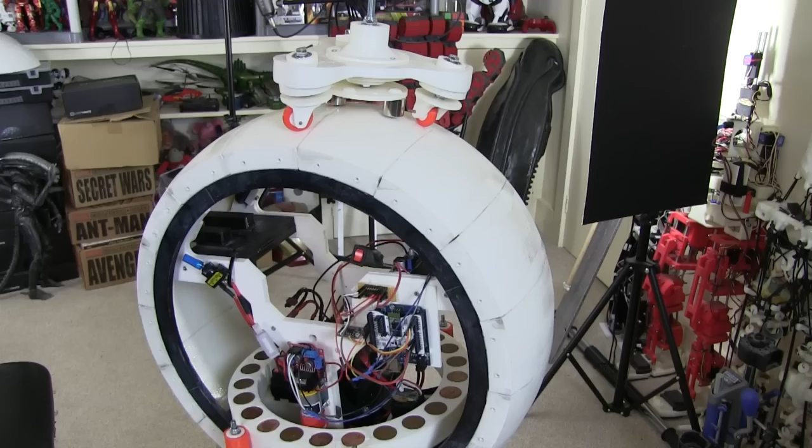Last time I worked on this dolly for the head, which has a magnetic coupling to the inside allowing the head to move in all directions. It's got a separate hub in the middle on bearings, so the head can rotate without all the casters changing direction. It's currently just stuck on with a plate in the bottom.

Today I'm going to work on the arm that actually moves that plate around, and it moves it in all directions and turns it. I'm hoping to use that for some form of side-to-side stabilization, but I need to work through that as I go.

Let's have a look at some CAD. This is what I've come up with so far for moving the head around, and it needs to move forwards and backwards in the direction of drive, needs to move sideways, and needs to rotate.

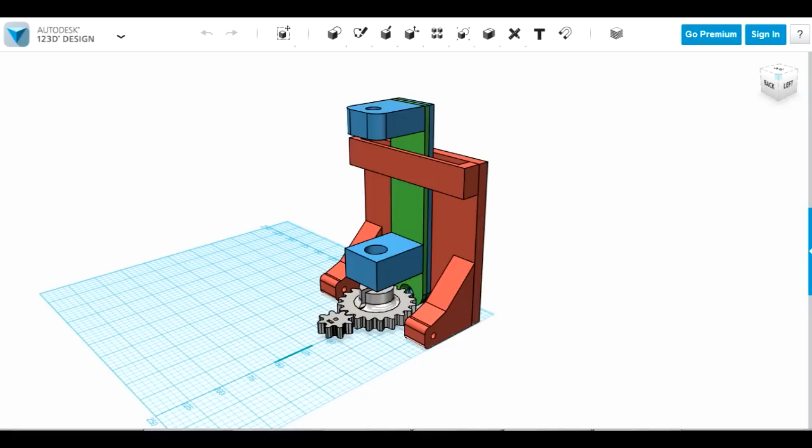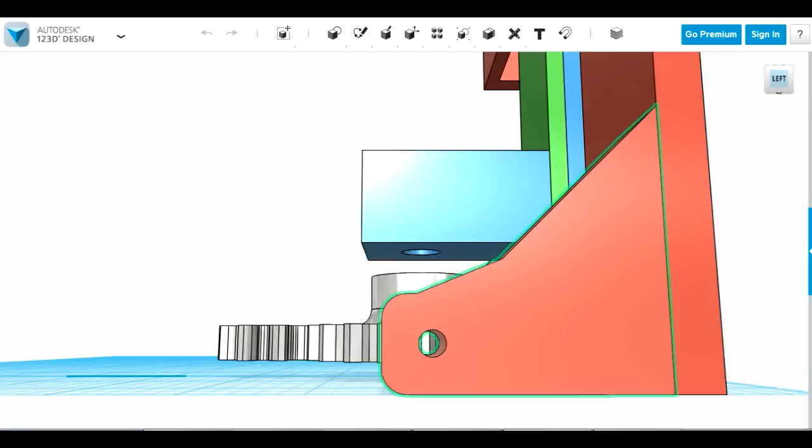Let's look at this red thing first. This pivots through the centre of the ball, and it has to pivot there so everything tracks the radius of the ball okay. This is going to have the magnetic coupling right on top, so it has to track that surface as closely as possible. The holes here go right in the centre of the ball on the internal hub.

There's a sort of pivot thing sticking up, and that's going to be on an arm or some sort of linear actuator I haven't designed yet that pulls it forwards and back. So the pivot point is actually right in the middle of the ball, and that moves backwards and forwards.

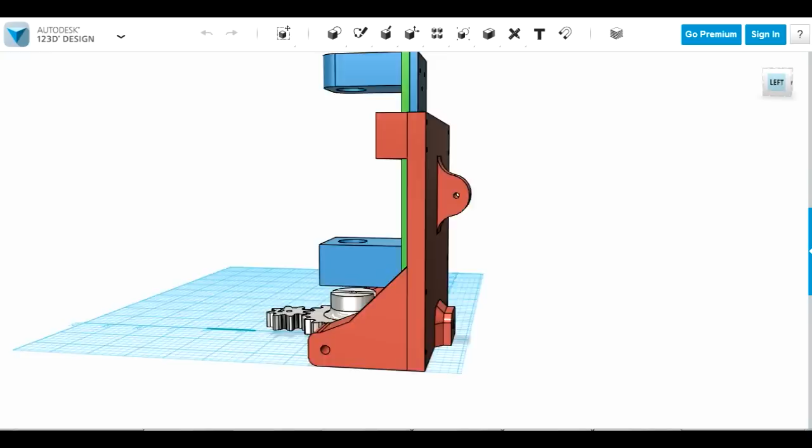The blue and green thing is made of 2 pieces, and that pivots through the hole right at the bottom of the red piece, which is also at the same height. So it's effectively on the same plane as the centre of the ball.

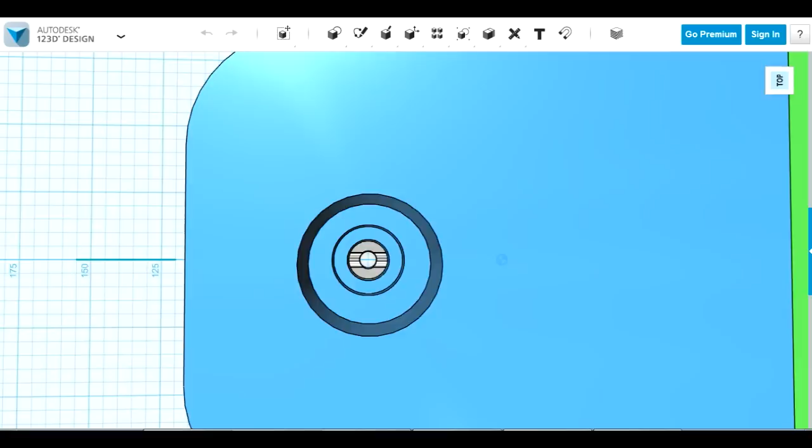We've then got another shaft that runs right through the middle of the blue pieces, let's just align them there. That's going to be a piece of 6mm studding which goes through bearings, basically controlled by these gears. The big gear is going to be fitted onto that shaft, and I've got a kind of thing here I can compress onto it by putting a hose clip round. The small one is going to be fixed onto a motor mounted on the bottom blue block somehow, with a motor mount I haven't made yet.

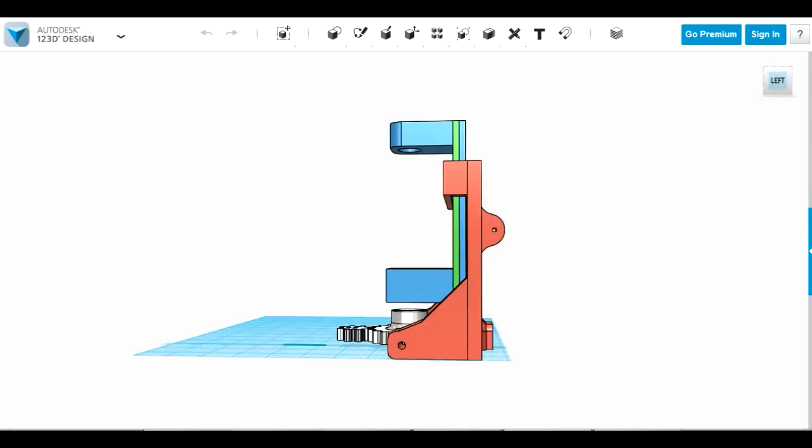That means the piece of studding runs exactly through the middle of the ball. It's in line with the hole in the bottom of the red thing, and therefore everything pivots around that point one way or the other.

Here are some of my parts that I've made. This has been made in multiple pieces. The green piece, if we'll call it that, has been made in 2 bits of ABS, and I've put these back to back to take out any warpage so it's perfectly flat. That piece pivots on here, and this sort of holds it, a bit like a strap.

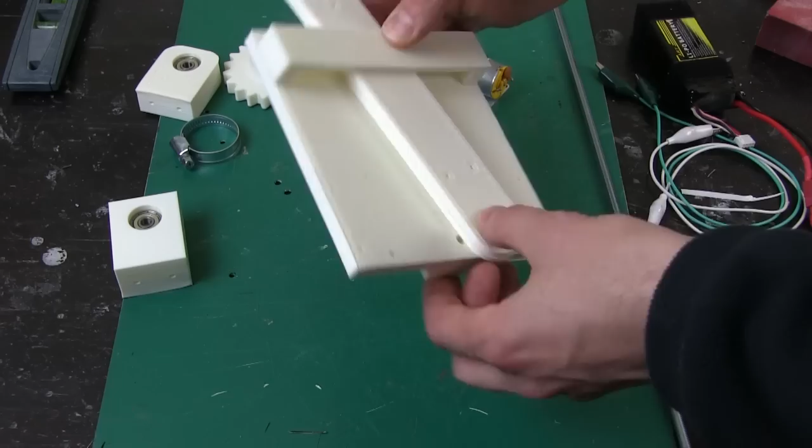That's printed separately to the back piece. I've also got side pieces that fit on here, which are still printing, and then I've got a piece of 6mm studding that goes this way, and that will rotate through these bearings.

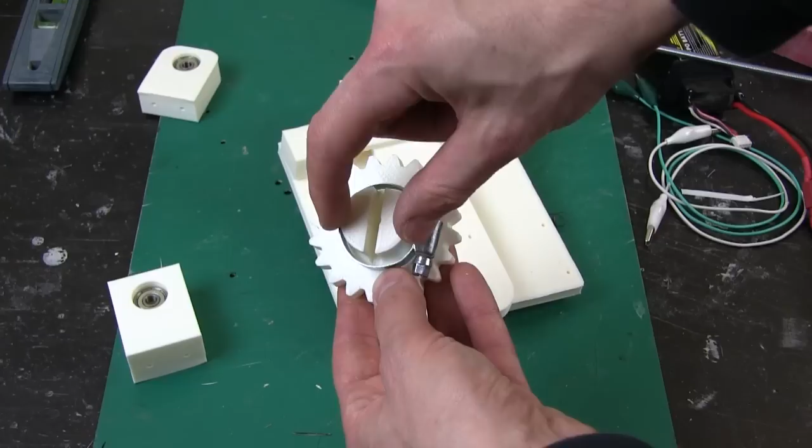At the bottom is a gear, and I've got this hose clip which goes around here so I can tighten this and it squashes it, and that grips properly on my piece of 6mm studding. I've actually printed these gears, one on the motor, and they work pretty well.

I've still got a bolt here which I need to take out, or at least make shorter, and that goes into a nut. There's a captive nut in there it screws into, so that holds it secure against the flat of the shaft.

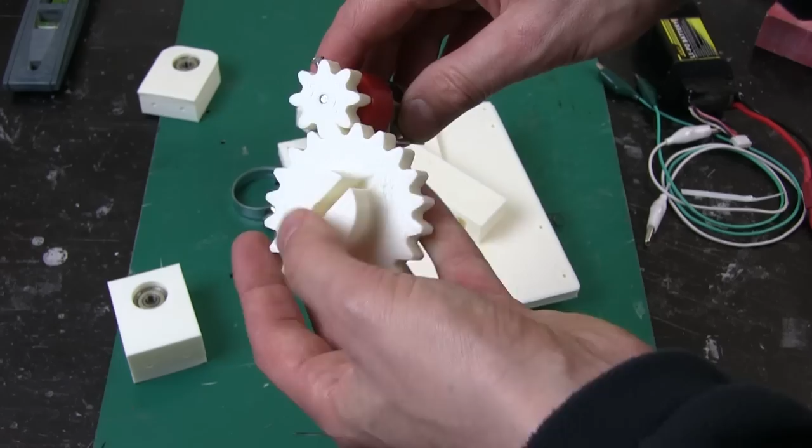So this will drive this round, and this is the head rotation. I need to get those extra brackets printed and screw and solvent weld all of this together, then hopefully it should be clear what on earth I'm talking about.

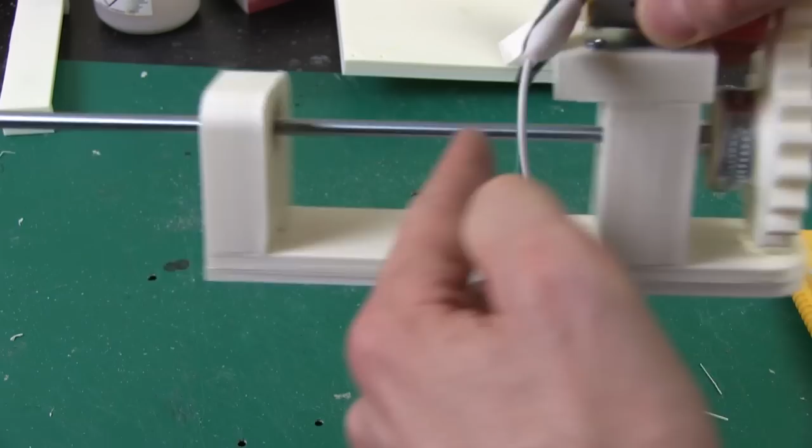Here's the first aspect of that head rotating mechanism, which is the dial piece, which moves side to side. I've mounted the motor there, and I've just printed an additional block that's exactly the right height. I've got my bearings in there, and eventually there'll be a nut to hold this shaft in exactly the right place, and I've got my hose clip on and a nut on the bottom.

So this appears to turn quite well. I've actually got this connected straight to a LiPo, so let's just connect that. So that's alright, and then this shaft of course turns the head.

Now it is going pretty fast, as you can see. There's nothing worse than a droid with a slow head, so obviously this is going to be speed controlled, so I'll slow that right down.

This shaft is turning all the way through bearings, which have just come out. Yeah, I really need those nuts to hold the bearings in. But this shaft turns all the way through these bearings, and then it turns the magnetic assembly on the outside, and that's turning another shaft through bearings which turns just the head shell. So hopefully that's enough torque.

This is only a 30-to-1 geared motor. If it's not enough torque, I can go to 100-to-1. These are the discarded motors from my first ball balancing BB-8 that I then upgraded for higher torque ones. So I know I can get a motor in exactly the right size which will fit and rotate 3 times slower with 3 times as much torque.

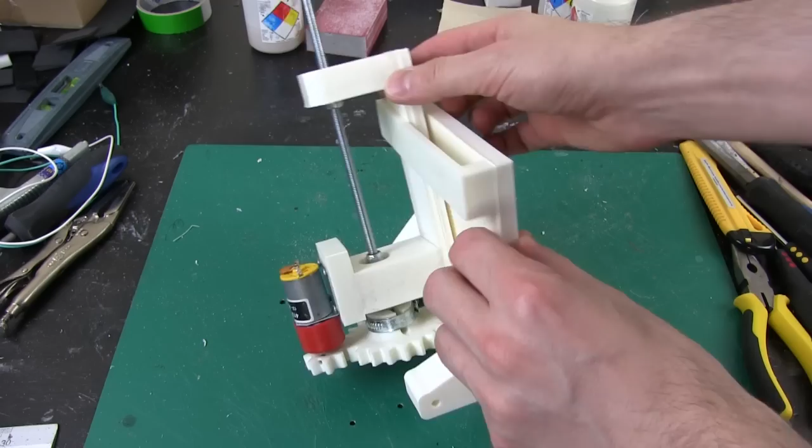Here is the mostly assembled mechanism. This moves this way, and it will eventually be pulled sideways by something depending on how much force it requires, probably a servo.

Here's the pivot point for backwards and forwards, and that will get pulled against this pivot point, like so. And this pivot point goes right through the piece of studding, and so does this one. So this thing always pivots around the exact centre of the ball.

So let's get that fitted inside, and we need to make a thing to stick the magnetic head coupling on as well, and then we'll see if that can move the head around and how much force is required.

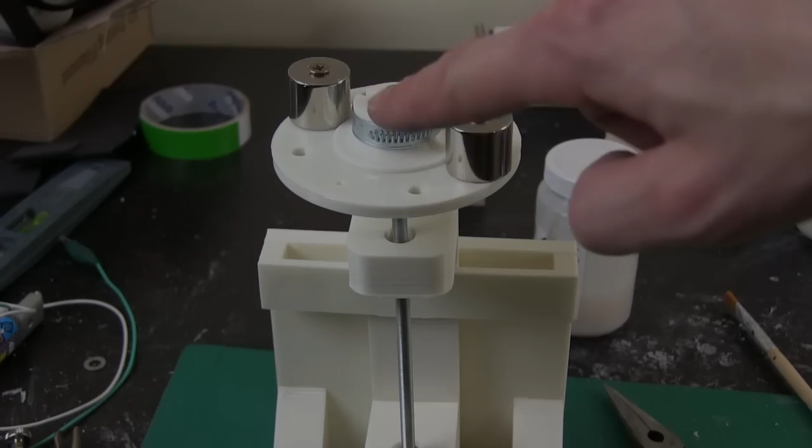I've just attached this additional piece here with another hose clip that's attached to the top plate. So now as the motor turns, it turns this magnetic plate round. Hopefully I can now squeeze that in the top half of the droid.

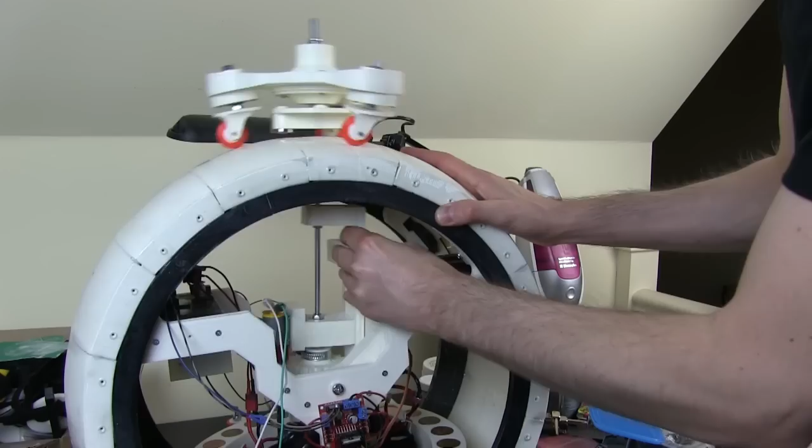I've got my head lever mechanism fitted inside now. I've got the magnetic coupling plate there on the inside, mounted right on the top of that stick, and the one on the top mounted under the head here. So that allows quite a lot of travel backwards and forwards, and that seems to hold the dolly on quite well, and it also allows a little bit of travel sideways.

At the moment the casters fall off the edge. Of course this will be a whole ball eventually, so that will give me much more travel, but that works quite well. Obviously if I push the inside it moves the dolly, so that works.

Rotating also works, so I don't have to rotate this whole dolly. I can just rotate those magnetic plates, which means all these casters don't have to change direction. That seems to work pretty well.

If I just connect that back to the battery, then you can see that that rotates. You can see the gears going round, and that will cause my head to rotate, and it can still move around in all directions. It goes pretty fast, and it still grips. So I can drive along with the head rotating and everything should stay in place.

So now it's time to put some actuators in to move the head backwards and forwards, and also side to side. So what I've done is printed this alternative piece, which is going to slot in place of this strap piece here that holds the dial in. So that will go in there.

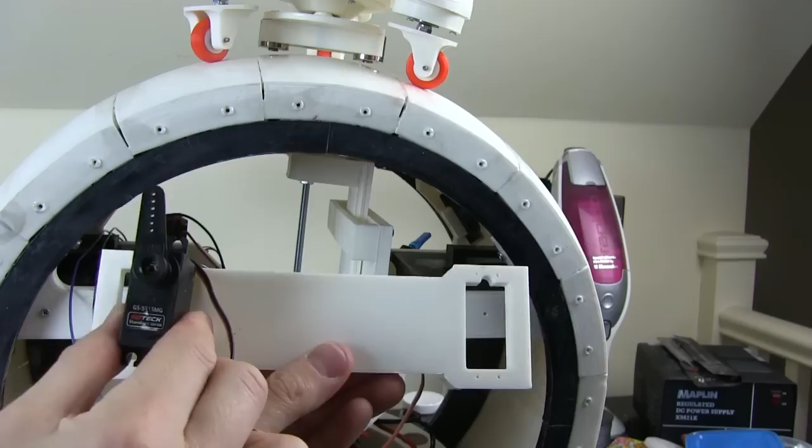This piece has space for 2 servos, one at each end, so I'm using these. These are 15 kilogram per centimetre torque servos with metal gears, and I'm going to have one at each end. That is going to push across a linkage between them that will in turn push that dolly piece backwards and forwards.

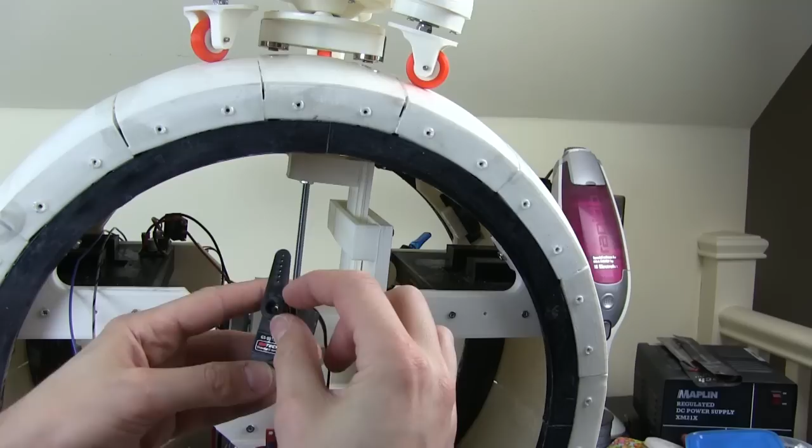So I've got quite long servo horns on here. I don't think I need all of this leverage, but 15 kilograms per centimetre means at 1 centimetre length from the radius, the stall torque at least is 15 kilograms, so they're fairly beefy servos, and I'm going to use 2 of them.

So I need to get that implemented, and then we can hold this head at least in the middle, even if we don't move it straight away. Then I can see how it drives.

The other actuator is going to act on that pivot point to move this backwards and forwards with some form of linear actuator coming up this way. That's something I will be putting on there so I can drive the head backwards and forwards. Although for driving, of course, I can fix it in one position and test it.

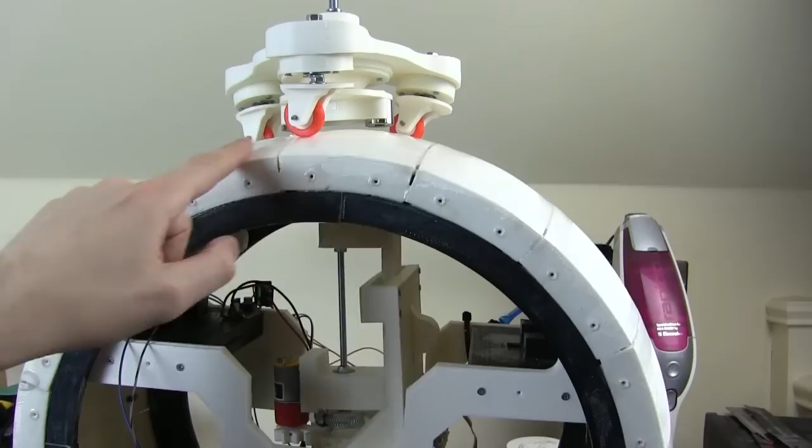Also, as the ball rotates, friction brings the dolly in the direction of travel. So as the ball rotates forwards, the head will naturally move forwards with friction, as long as I've got some form of end stop in here to stop it going too far.

So for the initial testing, I'm not actually going to put this actuator in. I'm just going to put the sideways one in, and then I can try banking by leaning the head, and I can work out the side-to-side stabilization.

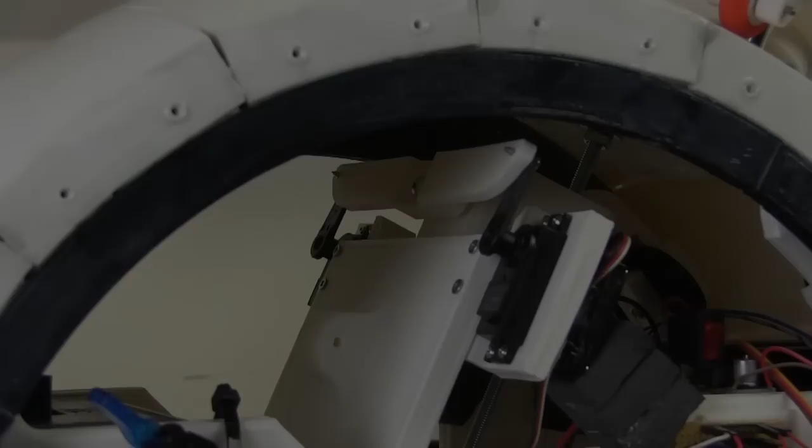My servos are fitted, and I've put this link in which goes between them, and there's a bolt in the middle that moves that wiper piece. So now when I move this, you can just about see the magnetic grip thing moving around on top.

I have to be careful not to drive off the edge. I really need the edges on the ball, but that appears to work quite well.

I've put some foam end stops on here which allows this to come forward. That's the driving position to go forwards. Of course it'll pull this back slightly, and that's probably the head position I need for driving forwards.

So the problem I've got is it wants to keep driving in that position, or in fact whichever way I put it, and that's because it's like pushing the ball along, and the inertial measurement unit that's stabilising it is trying to keep driving. So before I can try and use the head for side-to-side stabilisation, I really need to do something about that.

The plan is to put another inertial measurement unit on this piece, which measures the angle of the head, subtracts it from the other inertial measurement unit, and then uses that value for stability, which means that as this moves forwards, it will compensate by moving the inside backwards. It should stay on the spot and not drive off, and it'll also remain perfectly balanced.

I'm going to do that before I even think about putting the actuator in, so hopefully I can just leave it posed forward and drive forwards, and when I'm giving it a set point of 0, it's perfectly in the middle and stationary.

I've now fitted another inertial measurement unit right in there, which is attached to this head stick, so it obviously moves with the angle of the head.

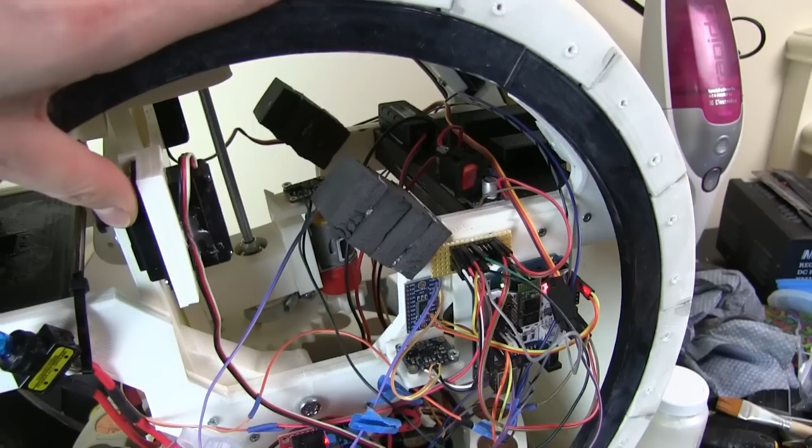I'm using an I2C multiplexer, which is another board from Adafruit, right here, which is combining the signal from both of the inertial measurement units.

I'm not going to go into too much detail about that. I used this in Project Ultron to combine 6 of these inertial measurement units to make a motion capture suit. So if you want to know more about that and some of the issues I had initialising the sensors which I've worked around, have a look at part 2 of Project Ultron.

So basically these IMUs are from Adafruit, they're BNO055s, and they just give me the data, so they just give me the angle and do all the maths for me. So all I'm doing is taking the data for the angle of the head stick and subtracting the main angle, divided by a factor of 3 to make up for the increased leverage.

And then just sticking that data into the same PID loop that's running my main motor. Now everything's pretty stable. So if I move the head forward, instead of it driving off, you'll notice the internal hub moves back a little bit, basically 3 times less the angle.

And that stays stable instead of driving off. The whole thing is still stabilised, so if I push it, it still drives along. And if I put it back in the middle, you can see that centre hub moving back to the middle. If I put the head stick back, it moves the other way a little bit.

So now this drives pretty well. I've got my side-to-side motion working. I've got stabilisation from wherever the head is. And let's give that a go.

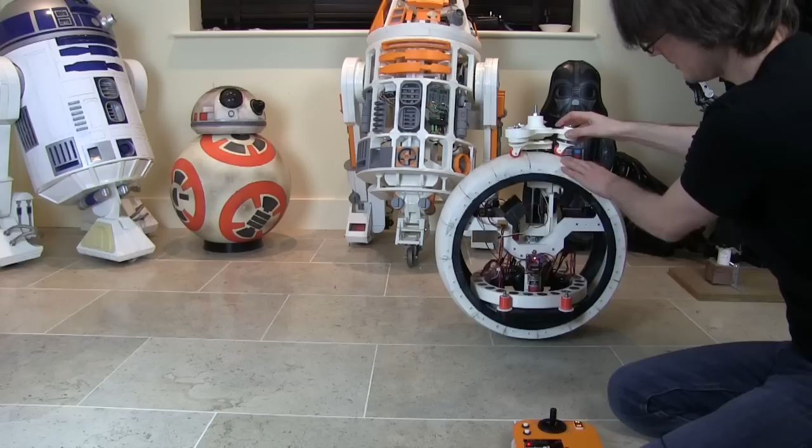So here we go, we're going to do a complete test. I've got my side-to-side motion working and all the other things. So obviously as I move the head stick around, the inside compensates as I showed you. I do need to tune up that multiplication factor between the 2 IMUs as I build the head up, because obviously this will be heavier and have an influence pushing it forward.

It does tend to creep forward sometimes, so I didn't get it quite right on a smooth floor, so I need to test that. But basically I can drive pretty well.

Bear in mind the head is a bit wobbly, and that's because the head stick is actually wobbling around freely inside there. But also the dolly part that moves sideways, there's quite a big gap in the slot it's in, so that moves independently. So I need to put a little bit of a guide in there, which I'll 3D print, just to keep that firm.

Obviously there's no actuator at the moment, so it flops around in whichever way the ball is going to go. But it works pretty well. I'm pretty happy with it so far. Haven't retuned the PID loop either since last time, so I could look at that and retune some of those settings, but it works pretty well.

With the head in the middle, I can still turn on the spot. That seems to work okay.

And I've now got the ability obviously to move this head sideways on top. Hopefully you can see that pretty well if I don't drive off the edge. So if I don't hold the ball, then I can actually introduce quite a bit of side-to-side motion here just by moving that.

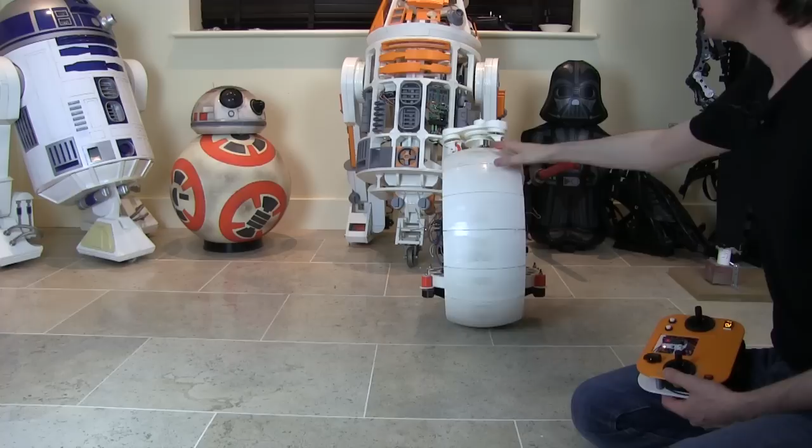So I'm hoping to stabilise it sideways by doing the same thing, and this is very similar to the ball balancing robot I built, which is over there, where the head actually balanced on the ball. So if that works, if I deaden this by hand, then it stays there.

So this should be a much easier problem to solve, at least with the IMUs doing all the maths for me. So I should be able to easily stabilise side-to-side wobble by moving the head, which is the next thing to do. But apart from that, I'm pretty happy with how it works so far.

It seems to drive okay. So it's really that and the linear actuator for the head we need to sort out. And at the moment I haven't got anything driving the head spinning motor, but it does spin round. Hopefully you can see this turning round as I turn the gears. So that's another thing that needs to happen as well, but it looks like it's pretty good so far.

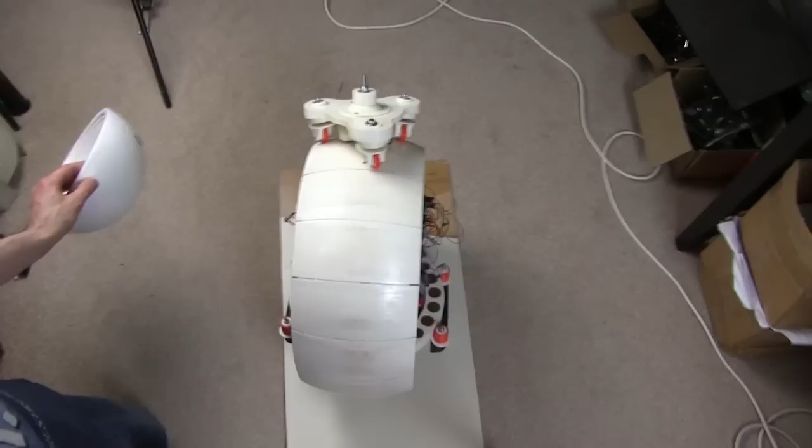So let's talk about side-to-side stabilisation. Obviously this has some wobble in it as it goes. And it has no way of shifting mass to balance like it does to move forwards and backwards. So the plan is to move the head side to side to kill the wobble.

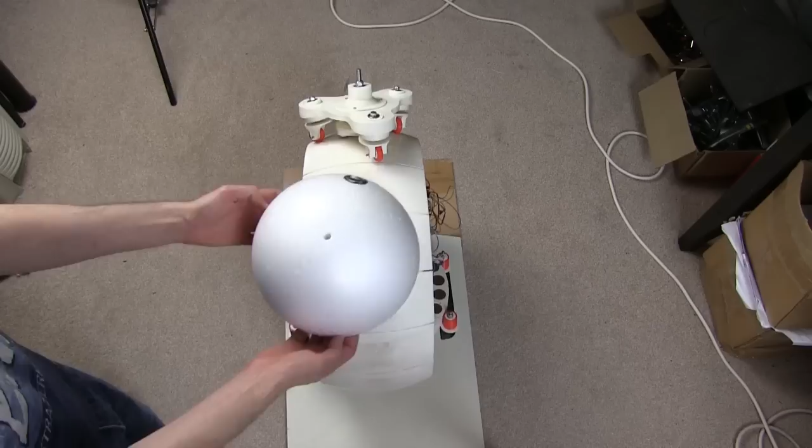Now what would seem logical would be that if it wobbles one way, to move the head the other way to compensate. And then as it moves back, move it the other way, and hopefully centre them all in the middle. The problem with that is, of course, that when you do this, it's actually pushing the ball further this way. And then when it wobbles back and it pushes back the other way, it's pushing it the other way. So what happens is you end up with this constant oscillation with it never settling.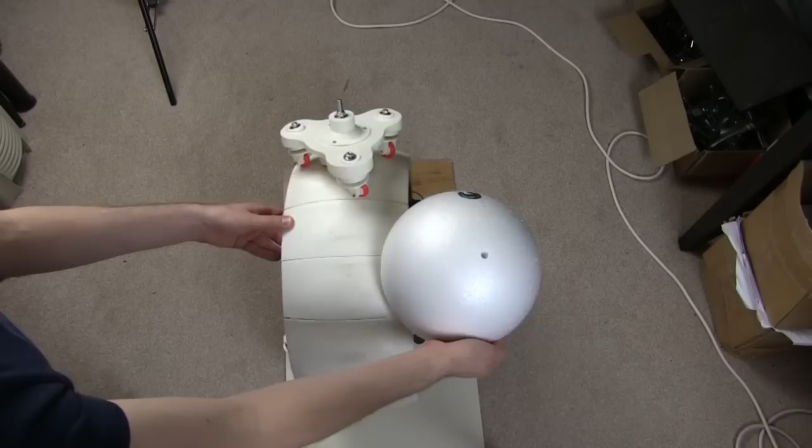So in fact what I've done is moved the head in the same direction. So as it moves, the head moves this way and then slowly back, and that actually kills the wobble instead of it moving the other way and making the problem worse.

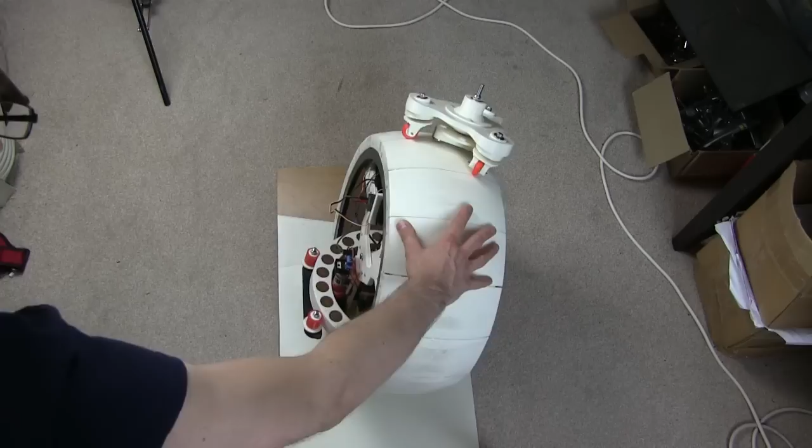So now as I move my head, or at least as I move the body, the head moves in that direction as well, which almost works to kill the wobble. Now I have a problem because I can't go as far as I want, since it drives off the edge, unfortunately, but it does move in that direction and hopefully slowly settles back, and that should kill that wobble.

So if I now move this manually, what I really want is this sort of effect, and then a slow return to the centre. The aim is to try and kill the wobble doing that.

The problem I've really got is I haven't got all the mass on the head. My ball is probably a bit light in the bottom. Also I can't move the head as far as I want due to the sides here, which don't exist yet.

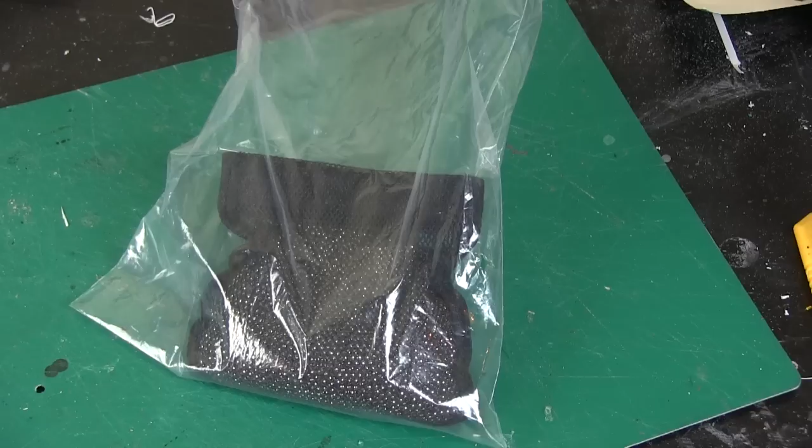Now I am prepared to put some more ballast in the ball, so it's going to be a bit of a balancing act as the head gets heavier. And I'll put the sides on, of course, which won't increase the centre of gravity, being round with a middle at the middle of the ball.

So I've got some lead shots here, which I got off eBay. This is for diving weights for scuba diving. There's 2 kilograms in here, despite its size. Lead is roughly 11 times heavier than water, so if it were water, it'd be 11 times the volume.

There are some heavier metals, including platinum, plutonium and uranium, which are between 18 and 20 times denser than water, but those are rather harder to buy on eBay.

I also found a suitable dome on eBay. I'm aware there are some 3D printable files which have come out of the BB-8 builders group, but those are going to be about 2 kilograms to print, so that's quite heavy to put on the head. So I wanted to find a lighter weight solution that I can either use or vacuum form over to make the main dome.

So I found this political globe, which is roughly 28 centimetres in diameter, or 11 inches, which is apparently the right size. And quite a nice globe of the world, actually. It's pretty lightweight, so I can probably use it as it is.

And it's conveniently, if I throw this away, already in 2 halves. There was some glue in which I pulled off, and the bottom half has this nice brim that I can sit onto the sort of skirt on the bottom of BB-8's head. There are 2 halves here, so I could use either of them or both.

So probably what I'll do again is vacuum form over it and then cut out sections and stick those back on, like I did with the version 1 head. That should make a fairly lightweight head. I think that's probably a few hundred grams, if that.